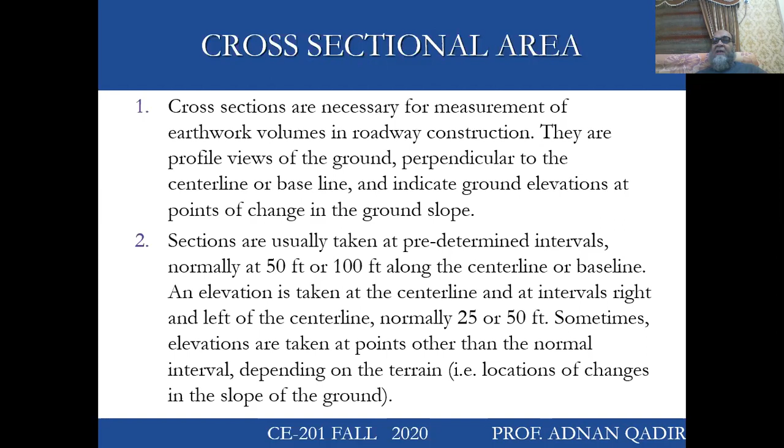For instance, I am surveying along this line. This is my center line, and say at this point I will take the cross-sectional area. I'm standing maybe on this point, and I will take one level. If my direction is like this, I will take one level around 25 feet on my left and one level at right 25 feet.

If I'm standing on this point, the level I have taken here is what we call the left, and the level I've taken on this point is the right. Now, if I look at the cross section, there is the elevation, and this is the distance from the center line. For example, from the center line, 18 feet to the right, I have 126 feet elevation, and then further at 29 feet, I have an elevation of 124 feet, and then at 41 feet, I have an elevation of 136 feet.

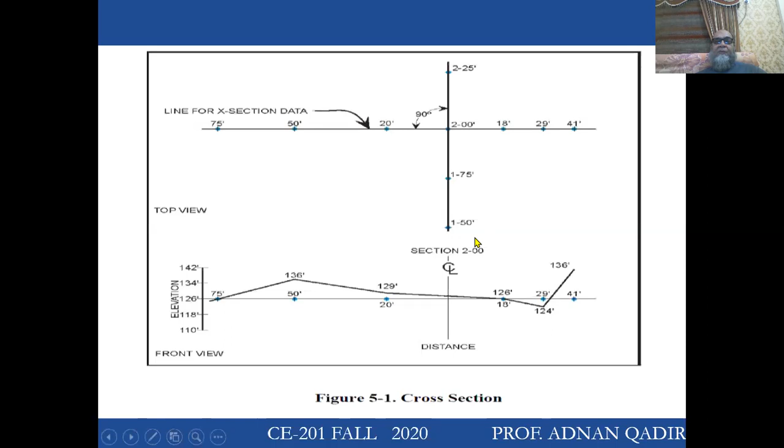First take this example. There is a road along this line, and we are taking elevations at different points along the center line. So this is my center line, right? And this is the whole width of my road section, right? We call this fill because the surrounding ground level is below my pavement level.

But if I go further, you can see that this road level is below this ground level. So you can imagine this is a section where you are going through an underpass; you are just approaching the underpass. At this point you have approached the underpass and now you are in the underpass. So this area where the surrounding ground level is higher, or if this is a tunnel, is called the cut area.

And if you have a mountain and a higher elevation, as we normally do in roads, then this is what we call a cut section. And between cut and fill there's always a transition; we go gradually from fill to cut section or cut to fill section.

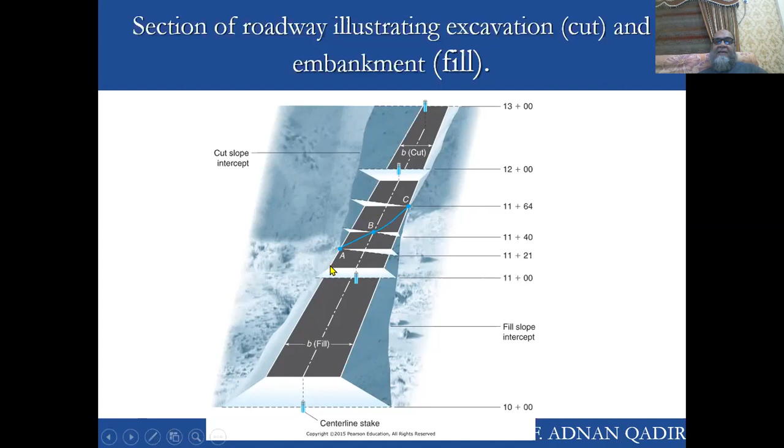Now, if I go to point C, then this is a fully cut section in which the elevation is at the lower side and so on and so forth. At this point, you actually see the other thing: for cut, the bottom width is lower and the top width is higher. But for fill section, the top width is less as compared to the bottom width.

So again, if this is my ground level and my pavement structure is at a higher level, we call this a fill section. If my structure is at a lower level, below my ground, we call that a cut section. By cut section, I mean that all this material below the ground level has to be removed to make the structure. And for fill section, I mean that all this structure has to be built over the ground.

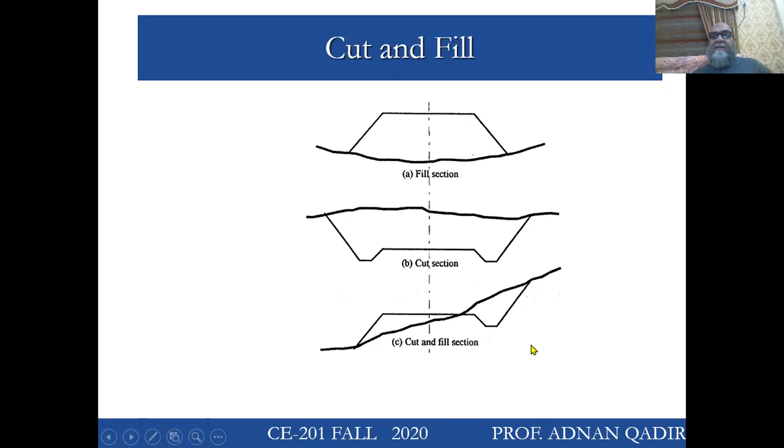And for cut and fill, you have to fill something and you have to cut something. At this point, on the left, you have to fill, and here you have to cut. So we call this a cut and fill section. So how do you calculate the area of these earthwork sections? There is a simple template given to you and you have to understand this template.

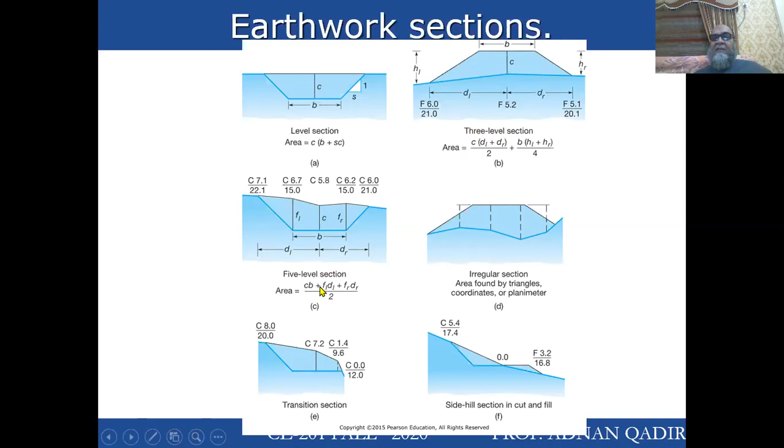So whenever a problem is given to you, whenever the surveyor gives you this type of level, you have to understand which formula to apply, or in other words, is it a level section? Is it a 3-level section? Is it a 5-level section? Is it an irregular section, or is it a transition section, or is it a side hill section?

Now, how do you recognize them? In the level section, there is only one level that is given to you. That is the center height, C. And then there is a side slope, S to 1, or you can say 1 to S, whatever you say. And then this is the width at the bottom. I call this a level section because there's only one level, that is, one height is taken. That's why we call this a level section or one level section.

To calculate the area of this figure, I mean this trapezoid, and obviously this is a cut section. Why? Because the ground is above, and another point is that the width at the top is more than the width at the bottom. So this is a cut, this is a one level section, and this is a trapezoid.

Now, this is a three level section. Why? You can see I've taken three heights. One height at the center, one height at the right of my cross section, what we call HR. This is the height at the right. Height at the center is always denoted by C, and then HL, height at the left.

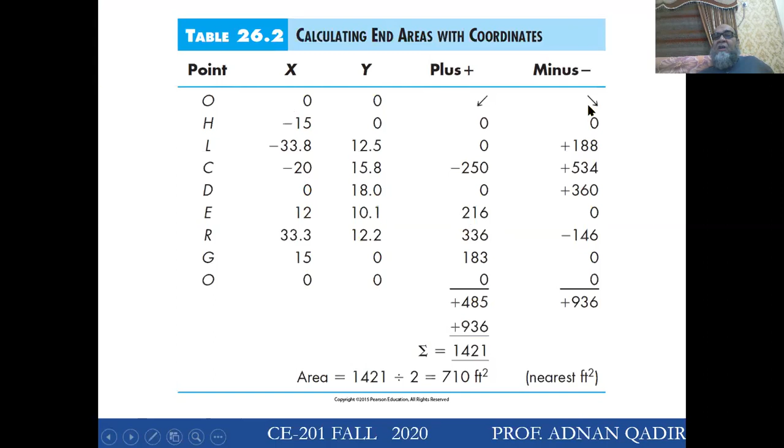First coordinate 0, 0, minus 15, 0, minus 33.8, 12.5, minus 20, 15.8, 0, 18, 12, 10.1, 33.3, 12.2, 15, 0, 0, 0, and then you know what to do. Just cross multiply: 0 into 0, minus 15 into 12.5, minus 33.8 into 15.8, like you did in the previous class. So this will be a plus column, this will be a minus column, add them, divide it by 2, and you will know the area of this very complex section in a very easy way.

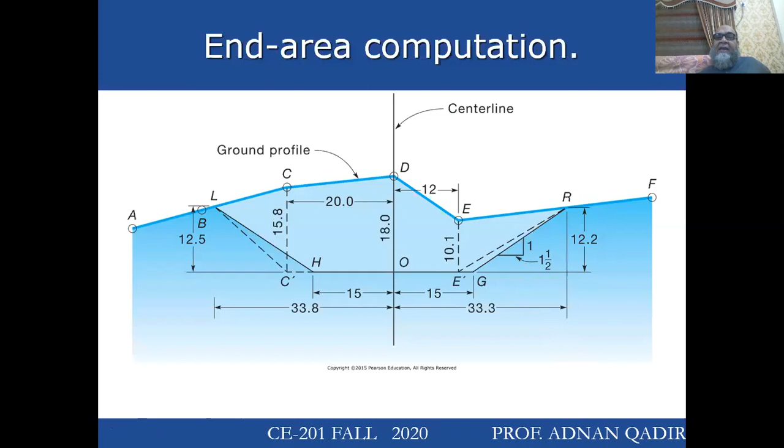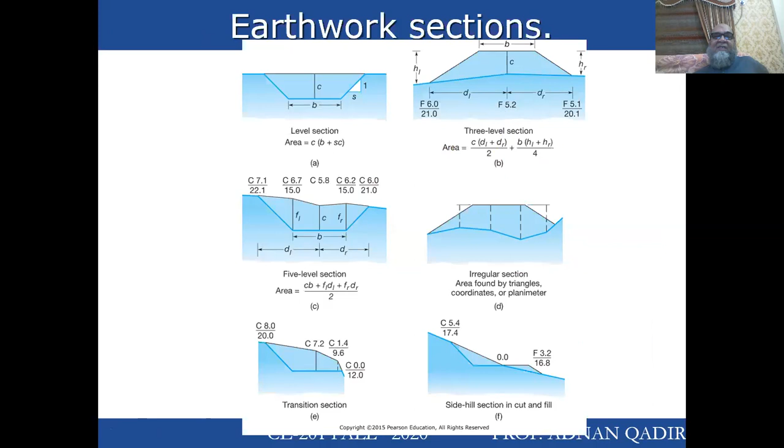Now this is when you don't have a simple geometric figure like this. If you have a simple geometric figure, use these formulas only. Those of you wondering whether you have to learn this formula, my answer is yes. You have to learn this formula.

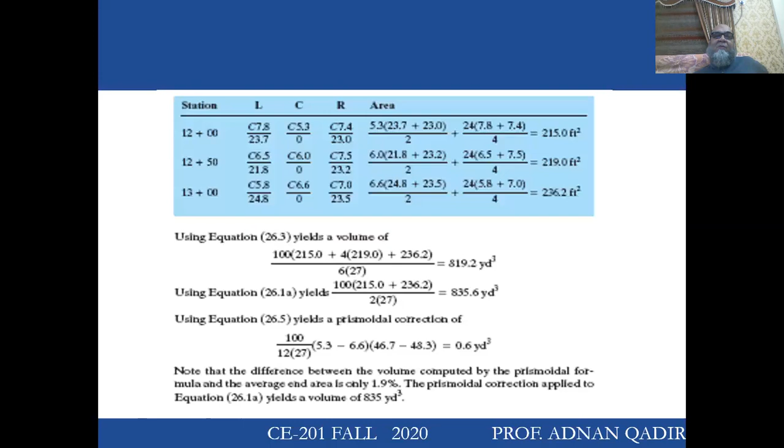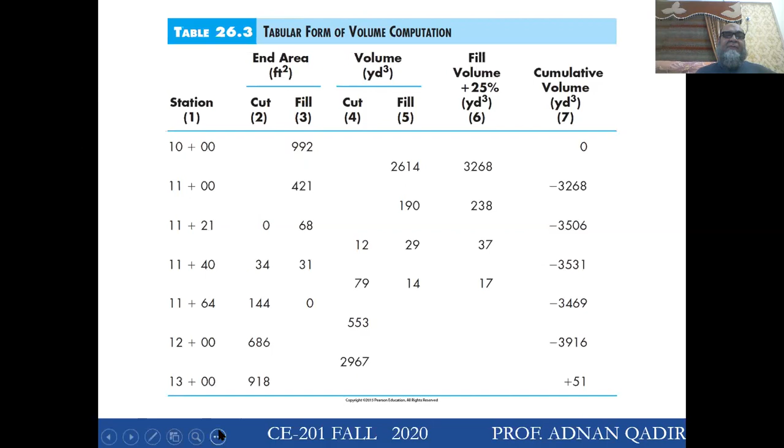Now, if I need to calculate the volumes of cross-sectional areas, actually, as I said, we are always interested in knowing the volume. How are we going to calculate the volume? A volume is nothing but area into length. So if I have been given this area, here the area is already given, and all I need to know is the length.

So I have station 10, which means 1000 feet, and station 1100 feet. So I will calculate a volume between these two areas. Simple. What I do: add this, divide by 2, multiply by 100. Right? So this way you will get the volume.

Now between 11 and 1121, this is 21 feet. So this is my length. I will add 421 and 68, divided by 2, because now I will calculate between these 2 points. 421 and 68 divided by 2, multiplied by 21, because this is the length.

Now for this, 1121 and 34, I have to calculate both areas, both the cut and fill sections. So between this and this, the difference is, what you do, 0 plus 34, that becomes 17, and then you multiply by 1140 minus 1121. So this becomes what? This becomes 19.

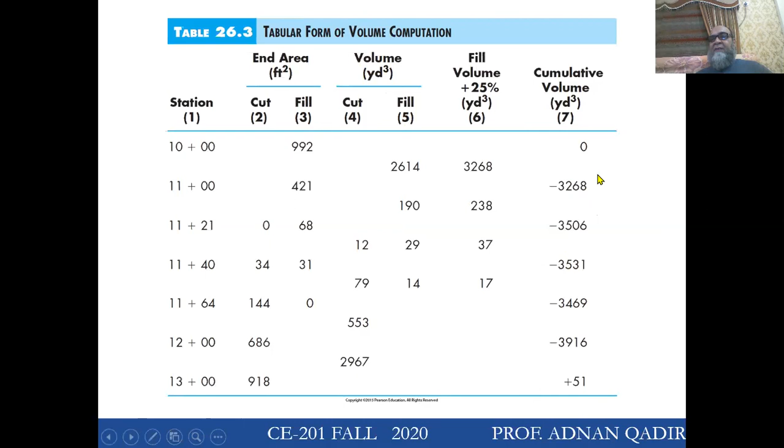That's why. So 34 and 0, this becomes 34, half is 17, and 17 multiplied by 19 is something else, not 12. But since I'm changing the unit, all these values have been divided by 27 to convert foot cube into yard cube. If you don't want to convert like this, you could take only foot cube and at the end, after the cumulative, divide by 27. It won't make any difference. Okay, so I think you have understood this.

And then the fill volume. So there is a cut volume and a fill volume; the actual fill volume is this, but the material required is this. So when we say cumulative, we add these values. For me, the first point is 0. 0 minus 3268 becomes minus 3268. I'm taking the difference between the volumes. Minus 3268 minus 238 becomes minus 3506. Minus 3506 minus 37 becomes 3531, and so on. This is how you calculate the values.

Now here minus 3916 plus 2967. Now what you're doing is the cumulative volume. I'm very sorry about this mishap. What I'm trying to say is that you are taking the cumulative volumes, meaning cut and fill volumes. So at this point, we'll say this is 0.

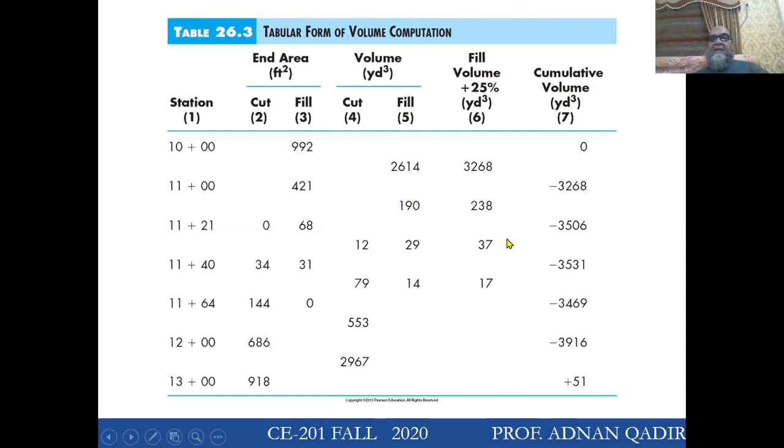Now I will take 0 minus 3268. This becomes minus 3268. Then minus 3268 minus 238 becomes minus 3506. Here, this is a fill volume. Now minus 3506 minus 37 plus 12 becomes minus 3531, because there is a cut volume as well. Then minus 3531 minus 17 plus 79 becomes minus 3469.

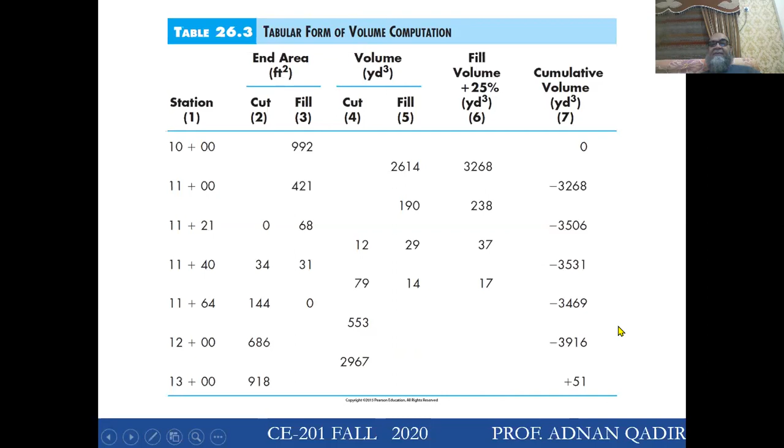Now minus 3469 plus 553 becomes minus 3916, and minus 3916 plus 2967... right? So I stop here, and we will continue in lecture 4 with calculating the volume from cross-sectional areas. I hope you have understood, and in class we will solve some other problems so that your concept gets clear.